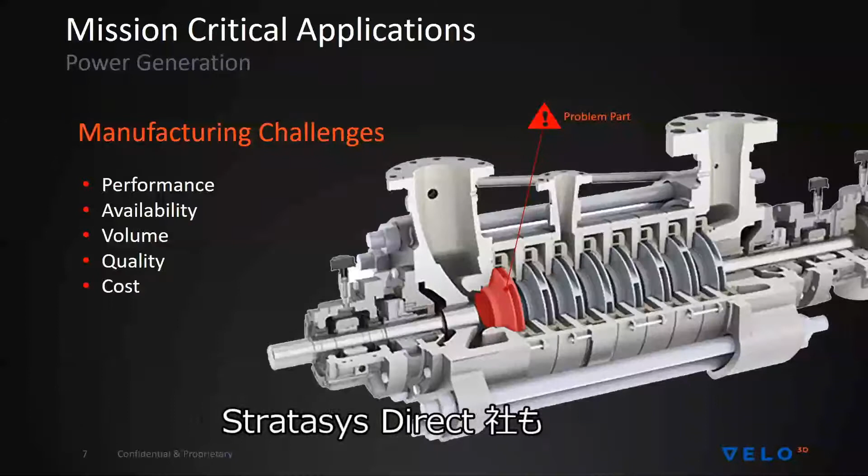One of the things Velo is really focused on is making sure that we can make these very complex parts successfully. Having customers like Stratasys Direct, who are more capable of the complete workflow of delivering a turnkey part, is really a critical factor for us as a company to provide value to the end customer.

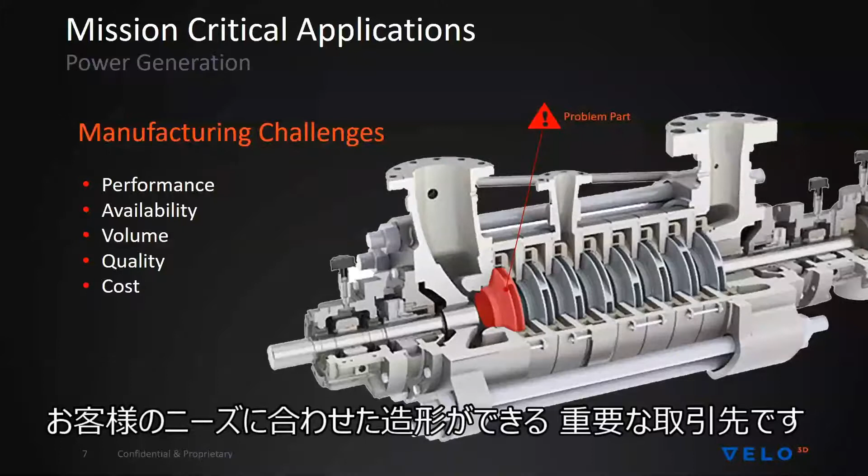As Mike referenced in the introduction, one of the questions people often have is around the transition from more traditional manufacturing to what we call our digital industrial manufacturing.

With traditional manufacturing, what you often see with many of these parts is that making the final geometry requires multiple steps. As you can see in this picture, which is kind of a turbine vane section, you have multiple machining steps. You have the inner hub and the airfoils themselves, and you have the outer hub.

There's a welding process you have to go through to join the two pieces together, an inspection of the weld, final machining, heat treatment. It's a very complicated process even to get just the part itself before you go through all of the final inspection.

With additive manufacturing, one of the things we see is that you can dramatically simplify getting the initial part, at the very least. I'm going to let Andrew talk to this a bit more because he's going to go through the entire workflow for the impeller we're talking about today.

The advantages of using Metal AM, and specifically Velo Metal AM, is that you can iterate much more quickly, refine the design, increase the performance, and really optimize the part for the function in which it will be playing a role.

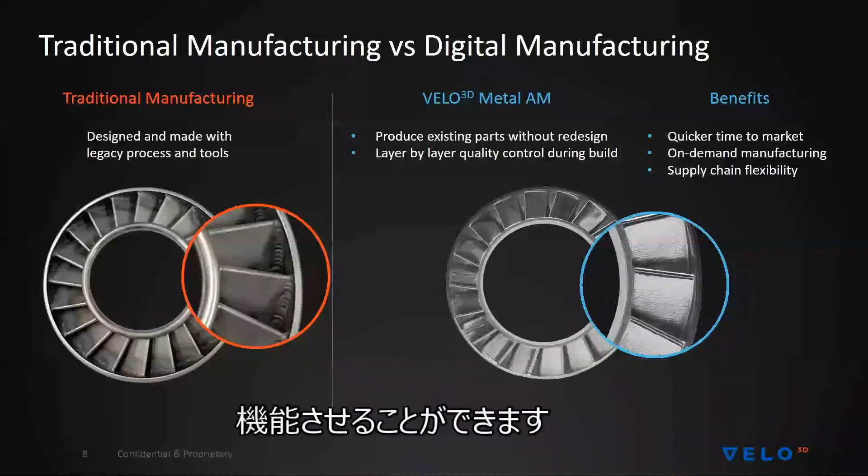The other note from the introduction from the survey was that supports are really a critical concern in metal additive manufacturing.

Even if you're an end customer working with a very good contract manufacturer like Stratasys Direct who can take care of a lot of the headache around the supports, you're still going to realize some of the impacts from supports in terms of the cost of the part, because this plays a significant role in the post-processing that's required for the part.

It also, in some cases, can even be so bad that you'll get a no bid. If a part is very complicated and would require supports that are essentially impossible to remove, which is the case for many of these power applications, then in most cases it's just not economical to make. Velo3D can really help address this through the capabilities we offer with our support-free manufacturing.

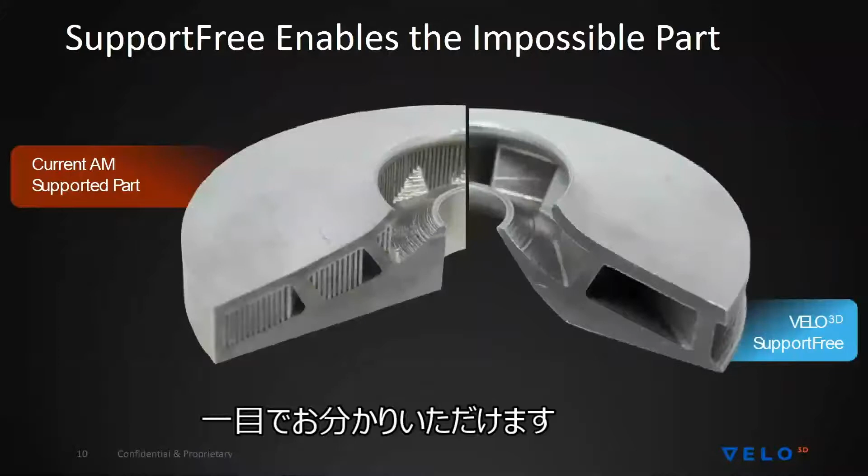A great example of the use of support-free manufacturing is in shrouded impellers. This slide illustrates the difference between what you might get from a more conventionally supported metal AM shrouded impeller versus the capabilities of the Velo3D systems and of manufacturers such as Stratasys Direct.

I wanted to highlight three differences in terms of the geometries we're capable of printing. If you've been following Velo3D, last year you'd have heard we're capable of printing down to 10 degrees without support structures. We've continuously improved our process, and I'm happy to report we can now print lower than that - all the way down to 0-degree overhangs in certain applications without supports.

Another main difference of our system is how it actually recoats the powder. We do that in a way that doesn't apply any force to the powder bed, which allows us to print some very high aspect ratios.

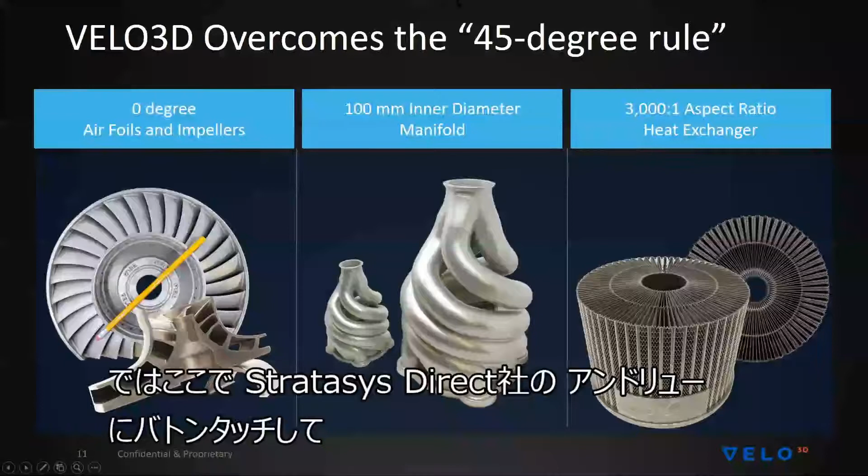With this overview of Velo3D's technology, I'd like to turn it over to Andrew to talk a little more specifically about the application we're looking at today.

Thanks, Zach. It's a pleasure to be here. That was a great description of some of the state-of-the-art 3D printing features found on the Sapphire system that are really allowing Stratasys Direct to take on increasingly complex components designed for even more demanding applications.

We're going to shift gears here a little, moving away from the additive system itself, and I'd like to direct our focus to the parts and applications additive is being leveraged to produce. I'd really like to think about how the industry is leveraging additive and the perception industry has of additive.

In doing so, I'd like to suggest a new, or at least amended, definition of part complexity to the additive community. But before I can do that, I need to provide a little background on Stratasys Direct Manufacturing to set the foundation of this perspective.

Stratasys Direct Manufacturing is an additive manufacturing service bureau or contract manufacturer. It's a company wholly owned by Stratasys as one of its subsidiaries. However, contrary to popular belief, we don't solely have FDM and PolyJet systems - rather, we have essentially all commercially available additive technologies. At Stratasys Direct, we implement processes and controls around those technologies and systems to offer them as services to industry.

We're comprised of 7 manufacturing sites spread across the United States and have over 3 decades of additive experience. Over those 30 years, we've produced more than 20 million components in over 150 different materials. At the onset of any opportunity, Stratasys Direct provides guidance towards the best technology and process for the component and its end intended application.

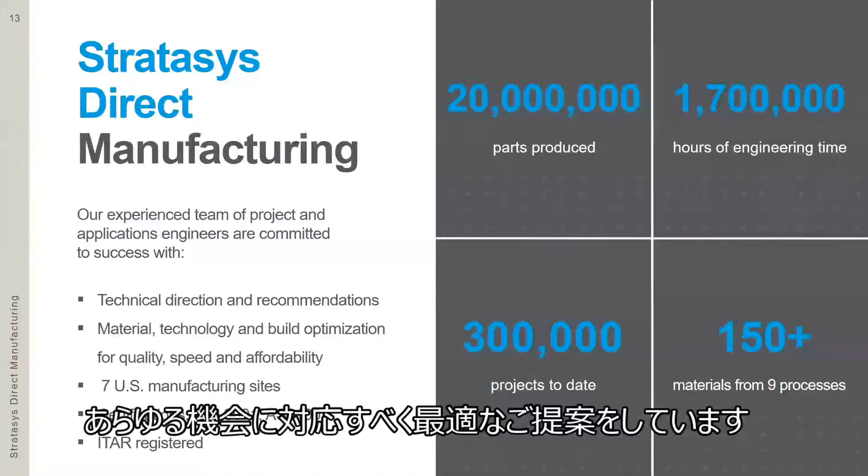Within Stratasys Direct's technology portfolio is, of course, laser-based metal powder bed fusion, and that's the technology of interest today. Our additive metals fleet is composed of 18 laser-based metal powder bed fusion systems. They process 9 core alloys, with a couple of ancillary specialty alloys specific for various customers.

The fleet is split between two facilities with similar additive capacity and redundant capability. By capability, I mean Stratasys Direct has added floor space dedicated to conventional tools to complement their additive systems. These CNC centers are dedicated to the additive process, meaning if they're not machining additive components, they're machining jigs and fixtures to machine additive components.

In addition to that, we have the necessary inspection equipment and dedicated labs to look at dimensional stability via calipers, height gauges, FARO scans, as well as CMM inspection, as well as looking at cut up, metallographically prepped and polished samples of the deposited material.

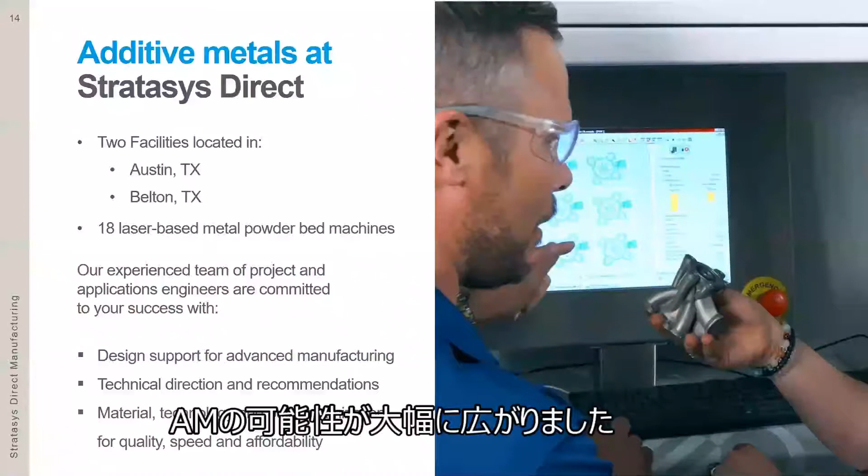Most recently, last year, Stratasys Direct acquired the Velo Sapphire system, and the features described by Zach have opened Stratasys Direct to new applications and a wider range of part geometries, and ultimately a higher level of complexity. This is a good transition to propose that alternative perspective of part complexity, or at the very least, what part complexity looks like now to the contract manufacturer, as additive manufacturing systems like Velo Sapphire machines are widening the geometries able to produce.

And it's not necessarily geometric complexity that I'm talking about. Don't get me wrong, Velo is able to produce more complex components than any other systems out on the market, but their support-free process really makes that step essentially easy. The complexity comes with the requirements, not only necessary for the component to function, but also give the customers the confidence that the part will function as designed.

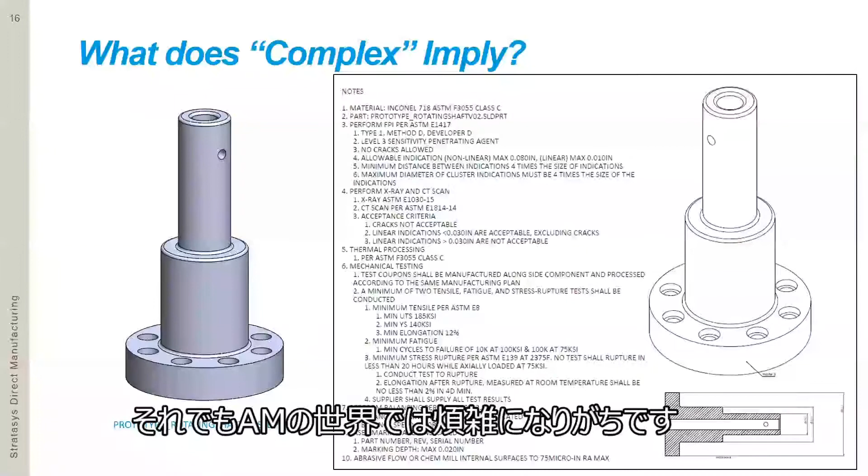As this drawing suggests, these requirements far exceed simple dimensional requirements. In fact, this is a relatively simple part, but the argument is that it's made complex by all the requirements. This is really shifting the focus of the conversation between the additive contract manufacturer and their customer. It's shifting it away from the additive portion of additive manufacturing and really diving into the manufacturing portion of additive manufacturing. And this may initially feel like an unsettling remark.

Customers and industry are coming from rapid prototyping where the part is essentially ready in days. And this has really skewed the perception of how to realistically implement additive manufacturing, regardless of whether this is for new product development or serial production.

To convey this point, I'd like to speak of four different scenarios, or essentially steps, that a service bureau must carry out and communicate with the customer to understand the true scope of an additive manufacturing project. The first step starts with negotiations, and I'm not talking about price. Instead, I'm talking about the requirements. A lot of these requirements require steps that aren't part of the core additive service bureau and require a level of understanding and experience that potentially may have not been explored.

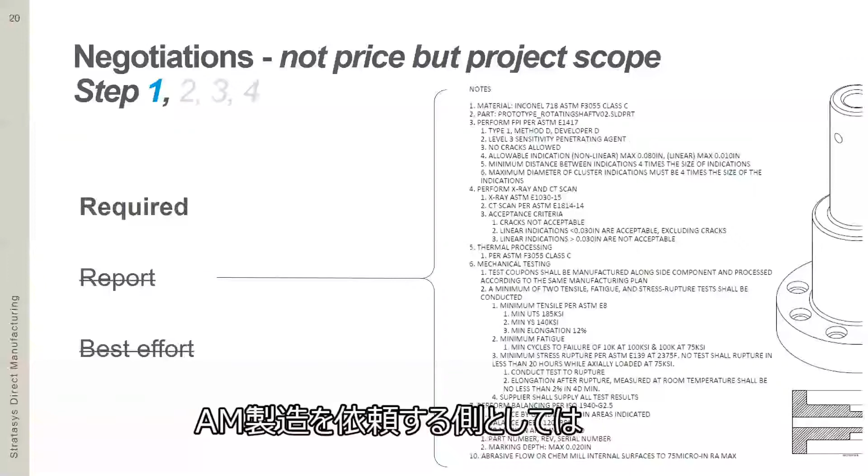So discussions with the customer need to dissect those requirements to figure out what is actually necessary and required to achieve or exceed, what requirements we might be able to simply report, and what other requirements might actually be best effort. As we get to these more complex applications, we find out that customers are really putting those requirements in for good reason, making the contract manufacturer essentially take all risk, because those requirements are there to reduce the risk of the component failing in the customer application.

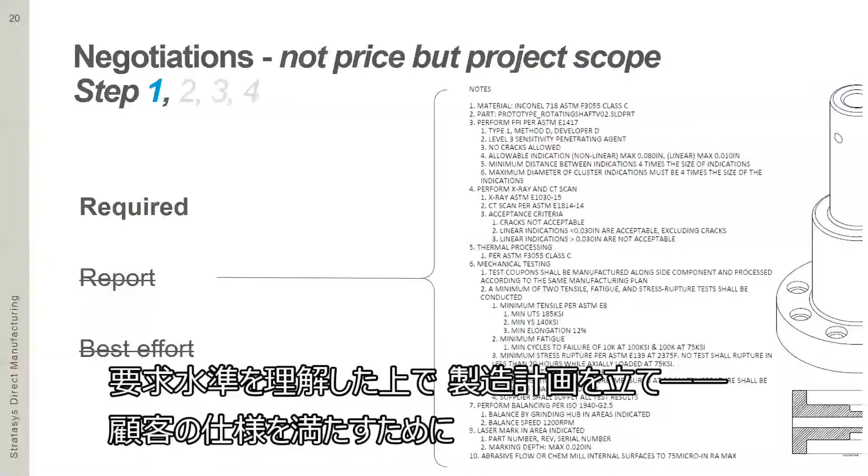So with the requirements understood and the complexity of those requirements understood, it's time to make a manufacturing plan. That manufacturing plan is essentially an outline, a list of operations necessary to communicate what needs to happen to this part along the manufacturing path to deliver the component as the customer desires.

In the example we were previously looking at with those requirements, we took those 10 basic requirements and it required Stratasys Direct to distill that into 35 different operations requiring 4 different work cells within Stratasys Direct and 6 different vendors. We can quickly see here, this is starting to become very logistically complex.

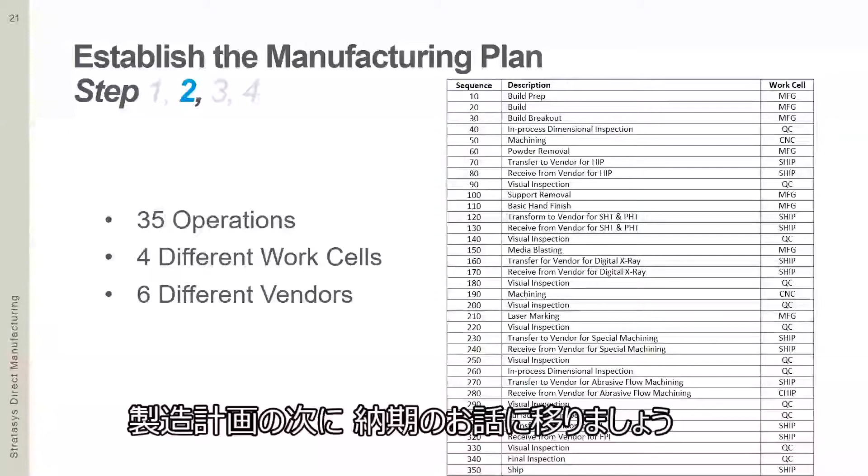So after the manufacturing plan is in place, we have to talk about timeline. And this has to be clearly communicated to the customer. Additive is accessed by customers because they believe that they can get a component quick. And that quickness is really relative, but it is still skewed because they hear a notion of a 5-day print as the elapsed time to deliver the component.

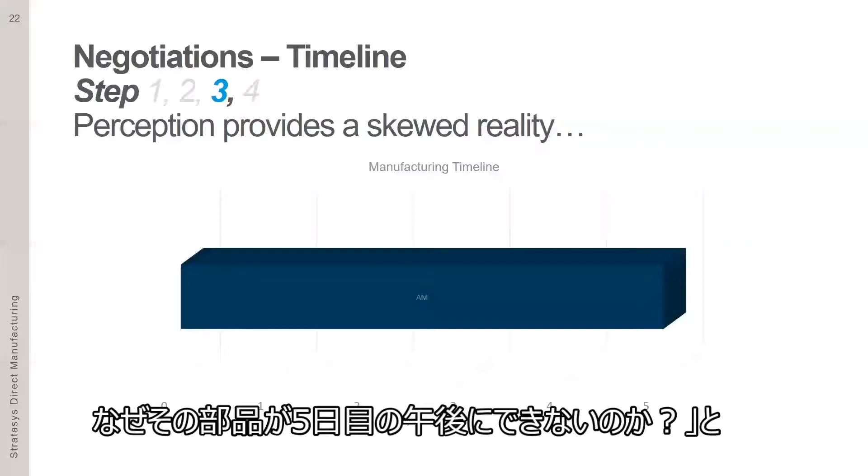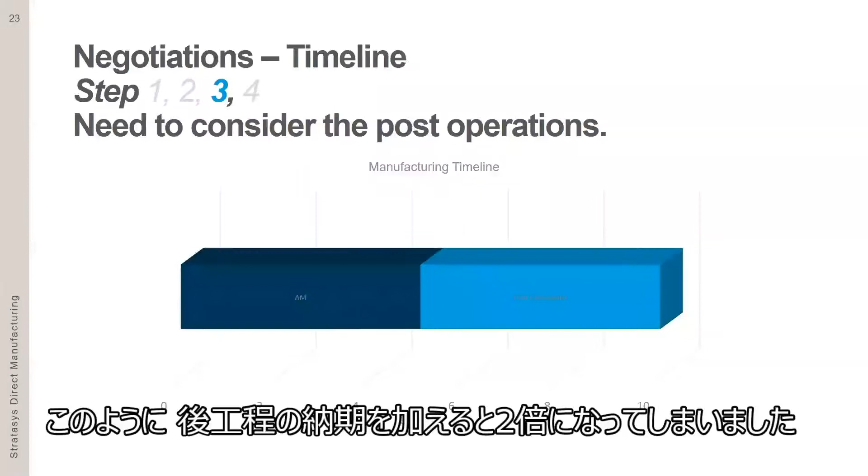So customers, even after imposing some of those more stringent requirements, are questioning us as a contract manufacturer, why wouldn't that part ship on the afternoon of the 5th day since it was a 5-day build? So we convey this notion of post-operations that at first glance might double the manufacturing timeline, because it's still additive manufacturing, of course. How could the post-operations being secondary to the additive process exceed the timeline of additive manufacturing?

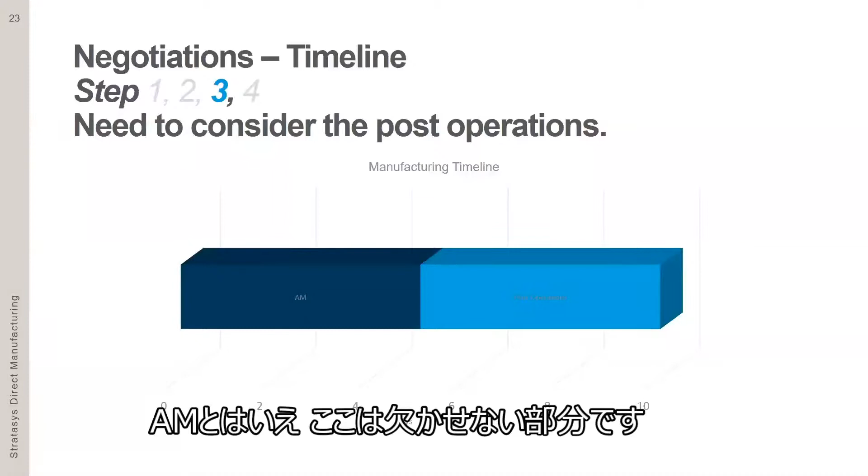Well, when we dissect it even further, we can say that AM is followed by secondary operations as well as inspection. And post-operations somehow makes those operations less important. So I prefer the word secondary operations because they're just as critical in delivering a functional component in the end.

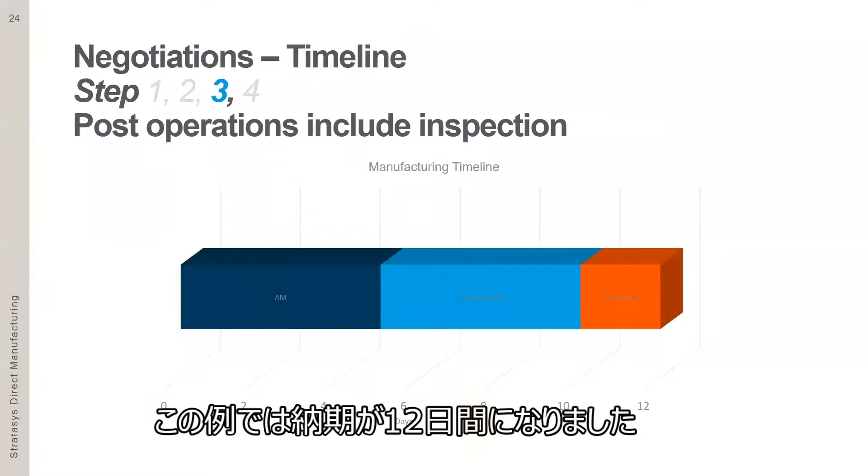Now we can see the typical timeline here is 12 days, and I'm going to argue that is still skewed with these complex geometries. Because when we turn back to the example we've been reviewing, we see the timeline here. And these are the necessary steps at a coarse level that the component and product needs to flow through in order for us to deliver the end-use component.

You can see AM all the way on the left there and the initial prescribed 5 days, and all the follow-on operations to deliver that component on day 50. And you'll even see QC instituted at more than one time, not necessarily all the way at the end. And that's actually a good thing. You don't want to be continuing to invest in a component that you could have identified as non-conforming earlier.

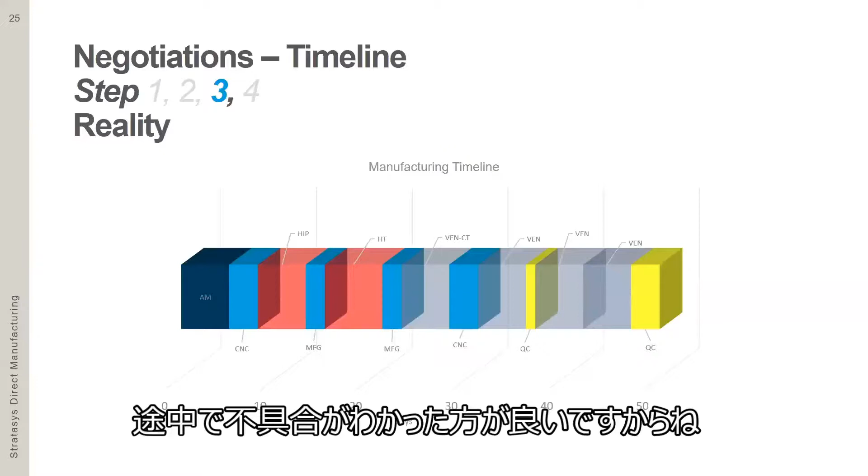So what I'd like to do to kind of drive this point home is put these timelines all on the same scale. And what we see is the perception of AM all the way at the top and the reality at the bottom. Now, additive manufacturing, yes, is quick to get the near net shaped part, but to deliver that end use part, it requires multiple vendors as well as multiple secondary operations managed by the contract manufacturer.

It's important to note at this point, a lot of those vendor applications, of course, require the component to be shipped, sometimes across country. So in the best case, the majority of the manufacturing time of these components is largely just sitting on the bed of a truck in transit.

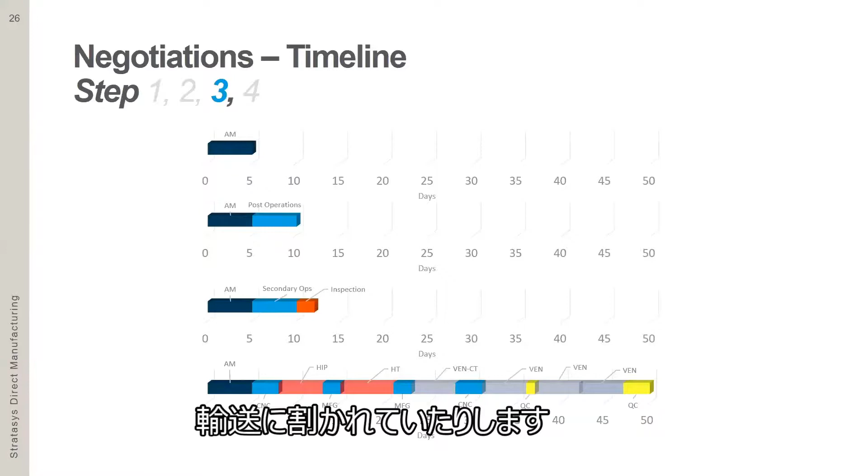So one last little notion of complexity that comes with these demanding components is the monetary investment that the contract manufacturer must stomach before they deliver the component. In this example, we're not solely talking about the time and material that the machine uses to build the components or the CNC centers and tooling costs there, but POs are cut by the contract manufacturer to vendors, increasing the overall initial investment of the component before it can be delivered.

And one thing to note is that as additive stands, the most expensive portion is largely the additive deposition, and that's largely due to the machine costs. Contract manufacturers need to start this manufacturing plan with the most money down, understanding that there's risk with each follow-on step and each transfer to a vendor. There's a lot of risk that is taken on by the contract manufacturer right up front. And that's just part of the additive manufacturing process as it stands now.

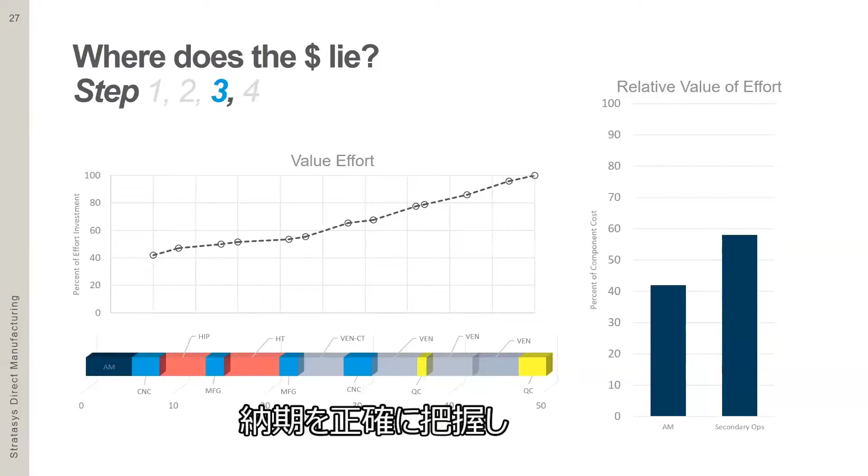But now that we understand the timeline, the customer sees the list of operations, we can finally execute the job. And the manufacturing sequence gets sent to the shop floor, the build is kicked off, the parts get machined, mechanical properties are verified, and part requirements are tested and reported. And I hope we all now understand that it's much easier said than done, and brushing over all these secondary and inspection requirements is really doing AM a slight disservice.

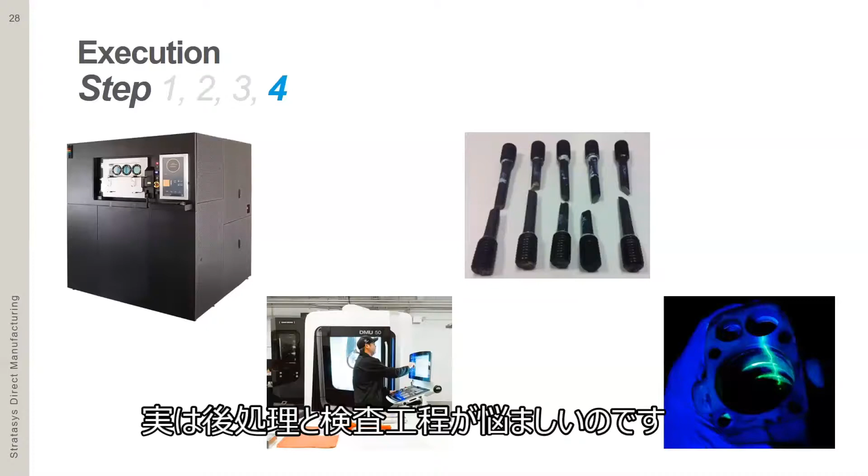Now, why do we go through all of this effort? Well, it really boils down to there was no other way to economically produce these complex components, and there's no faster way to produce these components. And to demonstrate this, I'd like to look at an actual project where Stratasys Direct actually partnered with Hanwha Power Systems to produce a radial shrouded impeller wheel for use in a full-scale elevated temperature test.

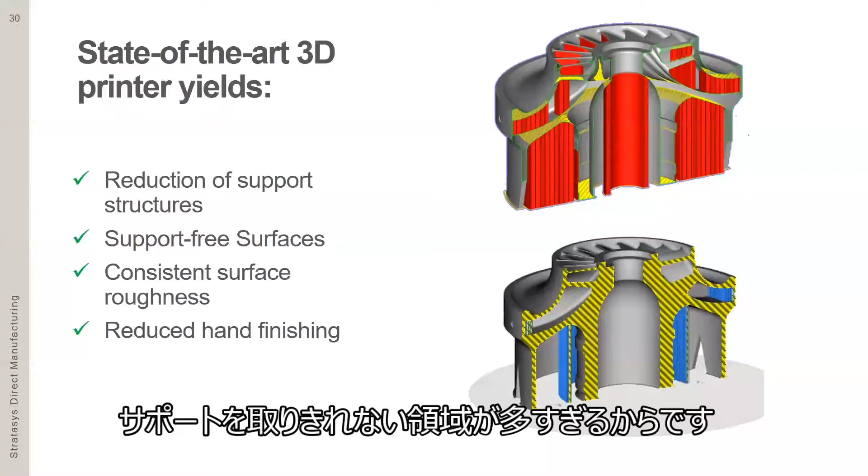What we see is that Velo allowed us to greatly reduce the volume of material and surface area that the component needed to support, and this really allowed us to deposit this structure. If we had to use the current art, build time would be too long, and it would have put support structures in areas that would be inaccessible to our secondary operations to remove. So straight off the machine, we have a near net shape part that met our overall size requirements as well as the geometric complexity requirements without adding all of that build time.

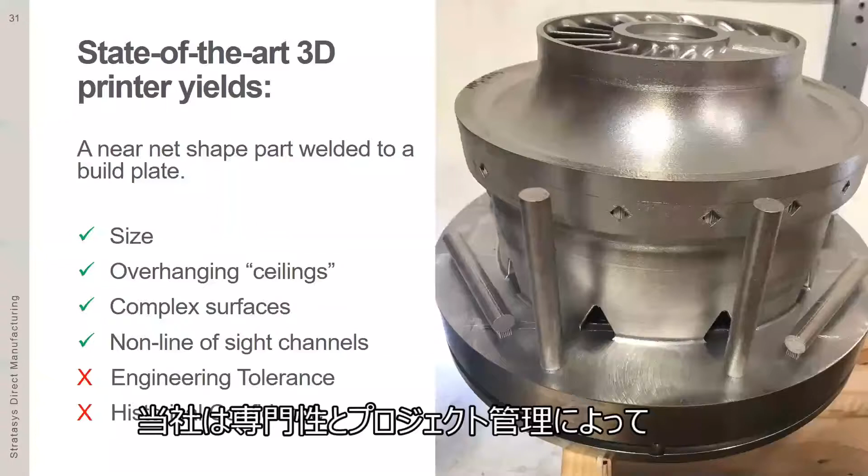However, the dimensional tolerances and the historical confidence in the process is not there, and that's where Stratasys Direct's specialty and project management stepped in. So it was the combination of the state-of-the-art 3D printing and the project management that really has made the impossible possible, where the near net shape part becomes a functional component through all the secondary operations that wouldn't have even been allowed to be executed if it wasn't for the system.

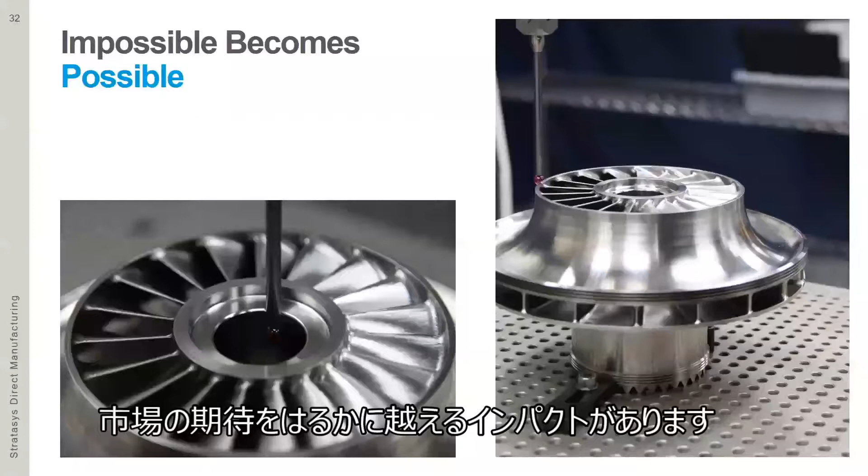Now you can see on this component that the vast majority of the surfaces have been improved in some fashion, all during those secondary operations. But the process and the state-of-the-art 3D printer produces more than just a component that the customer is happy with. It's also knowledge of the additive material process and confidence that it is ready for taking on these critical applications. So this effort with Hanwha Power Systems generated a wealth of data.

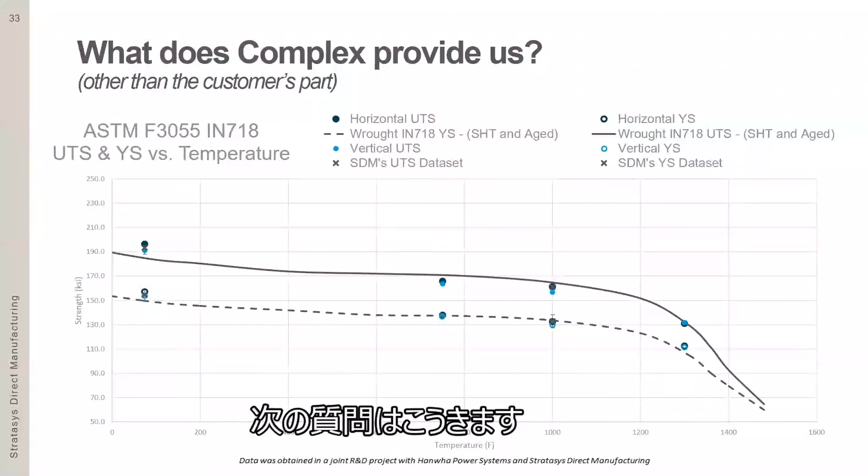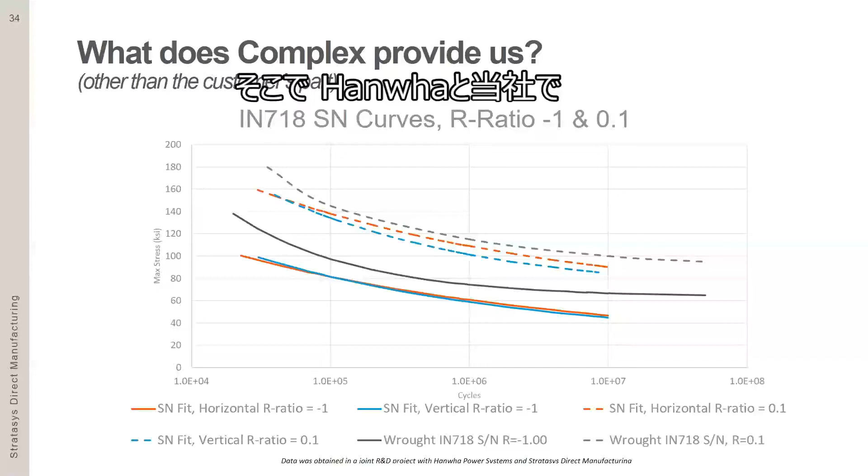But when I present tensile properties to customers, even as a function of temperature, the next question is obvious: well, do you have any fatigue properties? In these critical applications, especially rotating components that see thermal cycles, it's fatigue. So Hanwha and Stratasys Direct put together a plan to test the fatigue life at two different ratios of the deposited material.

We took that data and compared it to the MMPDS anticipated wrought values. On the top, we have the stress ratio of 0.1 in the dashed lines. On the bottom, in the solid lines, we have a stress ratio of -1. In orange, we have our horizontal oriented coupons, and in light blue, we have our vertical coupons. The real takeaway here is that there's great alignment between the two different orientations of the fatigue properties.

However, there is a slight decrease in the fatigue life for the additive material. But I'd really like us to, in the future, compare the spread of the data presented in the MMPDS handbook, and share that these ranges are actually fairly well overlapping. Let me put it in a different way: there's a lot of noise in fatigue data, and the curves here represent highly varied data. So all in all, the behavior is very similar to wrought properties, although slightly lower.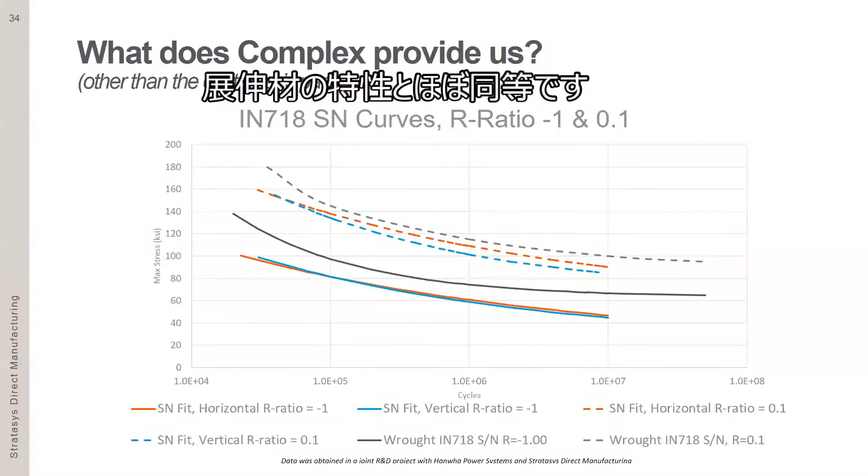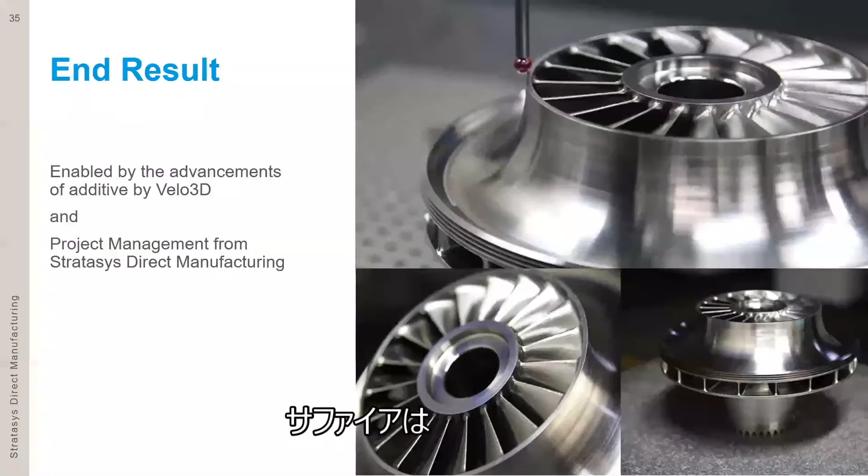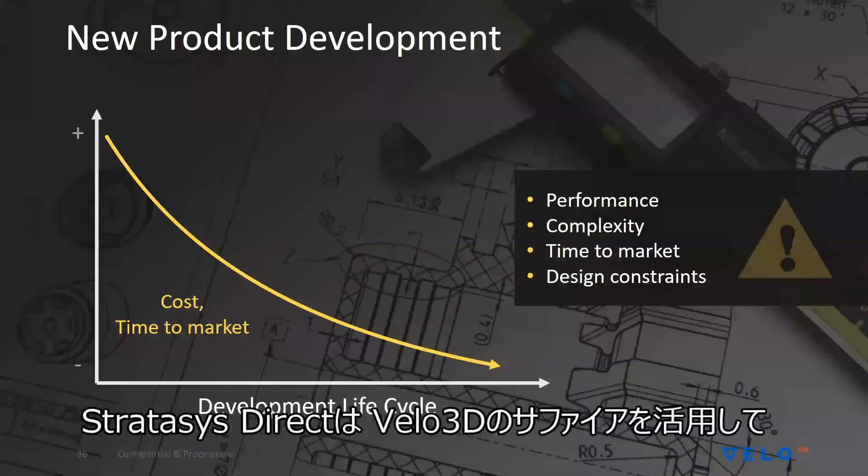The end result, enabled really by the state-of-the-art 3D printer and then the project management of Stratasys Direct, is a component the customer is happy with dimensionally and material strength and integrity, and ultimately ready for use in their end application. So the message here is that regardless of whether or not it is a new product development, as this slide suggests, or repeat serial production, Stratasys Direct is here to leverage the Velo3D Sapphire platform to bring your application to its turnkey solution.